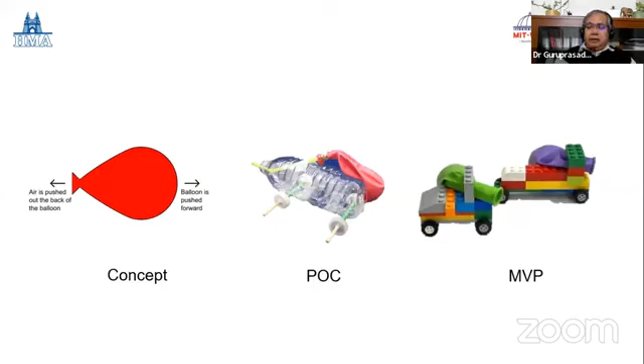Maybe one can be called a lorry and one a car, driven by this air balloon, right? And I think that is the important thing for any startup in order to get going. Soon after proof of concept, you should go ahead and make a minimum viable product and sell, make money. Entrepreneurship is all about converting creation to wealth.

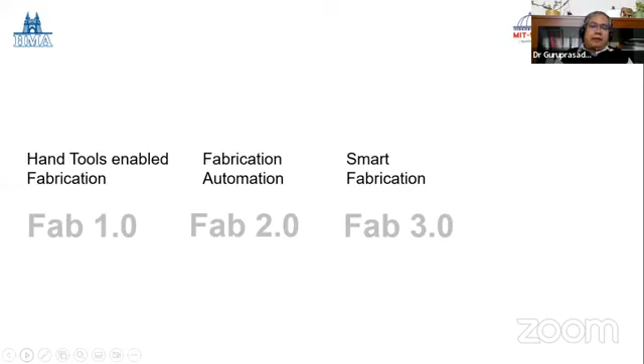So if we look down the history, hand tools enabled fabrication one, fabrication automation came a little bit with water wheels, steam engines, all that. Then with electric motors, smart fabrication came, and today we have smart bulk fabrication. Smart fabrication came with automation, robotics, and all. The smart bulk fabrication is because of the IT revolution, information technology and communication. Information technology and communication technology are fueling the growth of smart bulk fabrication.

How can bulk fabrication be smart? Can it produce just one part? Can a line system be changed so as to make the economic order quantity one? It is a manufacturing company's nightmare - how can we make just one? The term manufacturing was born in the early industrial revolution. Before that, there was no manufacturing at all.

The term manufacturing was defined to represent making of bulk, not in few hundreds, thousands, millions. That's very important.

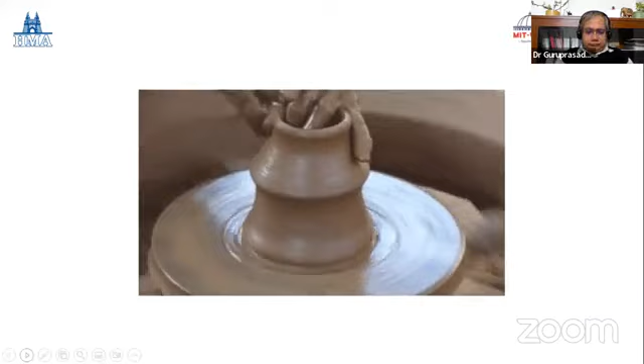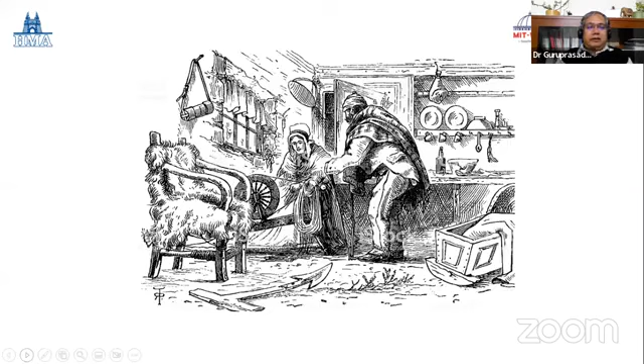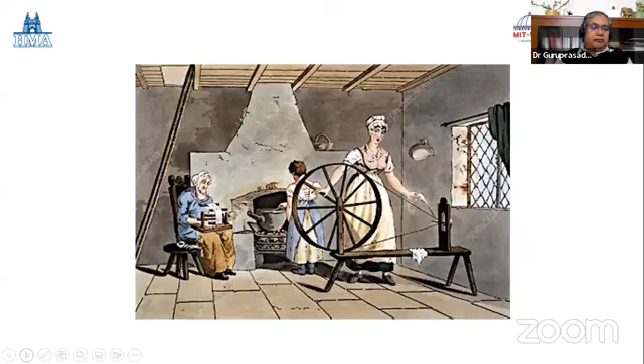And we know how they coped with the weather, and soon it gave rise to the cottage industry. But these were having delays. So in order to increase efficiency, they found mechanization. You can see here, this is a factory where you find no machine. People were doing the same thing at home, but now they are more disciplined, sitting in one place. And you can see there is a supervisor, and people who are going to train them or provide them with material. The first factory was born.

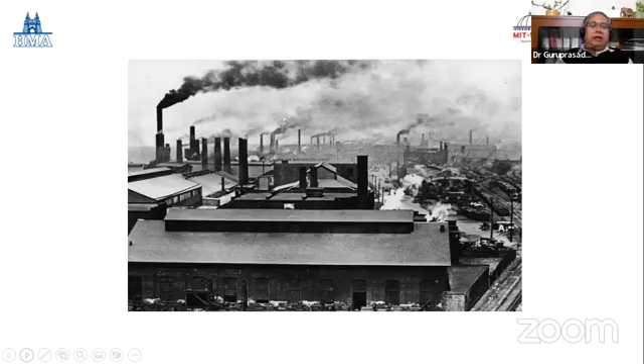With mechanization, they were able to put enormous energy into whatever they were making. In UK, we know the industrial revolution was born in the early 18th century, the textile mills. Probably Bombay, or any major city even in India which was a colony of British, looked much the same way in those days, that landscape. Soon was born the production line.

One side the chassis moves, and this is from Ford. It looks like a cow shed, no better than a cow shed. But you can see the whole concept: on one side the chassis moves inside, they put on all the engine, all the things, the seat, the whole thing comes, and finally they put the four wheels and it is wheeled out as a car.

So the division of labor, interchangeability, Taylorism, so many things came, and Ford gave the world the production line. Even today, for many cars, we need a production line which is dedicated. So we say this line cannot be changed because it is rigid, right? It is very rigid, we cannot change the line.

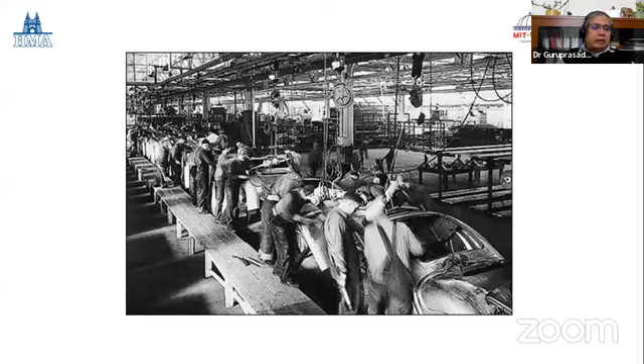So these were not flexible. But today's market is a place where the customer can ask for anything. We need to have agility. But the manufacturing setup is such that it resists agility. So how do we get agility? That is the very important point we have to answer.

With the advent of computing, a lot of things changed. The controls could be controlled not by a mechanism which moves, but with a wire which runs long, several kilometers. The electromechanical machine calculator gave rise to miniaturization because of miniaturization of electronics.

Soon, all such mechanisms gave rise to computing as a new discipline. So the world had a different, better, efficient means of making anything. Designing also became a very important occupation.

In the early 20th century, the Bauhaus school came and they started a new discipline called design, which is an iterative process. You can see how any product undergoes a sea change. You may have hundreds of concepts generated, only one is taken and launched. We call that an iterative process. You keep on doing it, and finally you get to the end of the tunnel, with some products getting into the market. That is very important.

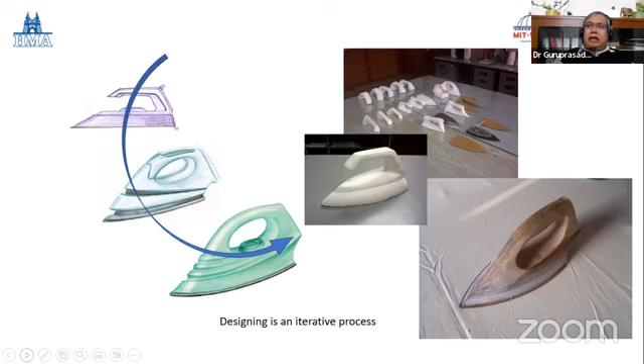Now, how do we do that? It used to take a lot of time. That's why marketing used to be under pressure, called time to market, which is long. So NPD was introduced - new product design.

People used to validate the idea, because any idea taken is not necessarily good. The idea has to be tested and validated. Only then does it become useful to business. If we launch every idea we want to launch, probably we'll become bankrupt. So an idea, if it has some potential, needs to be verified. How do you verify? Actually, you make it.

You can see the way people used to make things earlier - actually making a model, a mock-up model. In terms of electronics, you'll take a breadboard and assemble all the components and then check whether it works or not. If it doesn't, that is where the learning starts. You will know what is going wrong. Then you correct them. Now you know how it is, and you move forward.

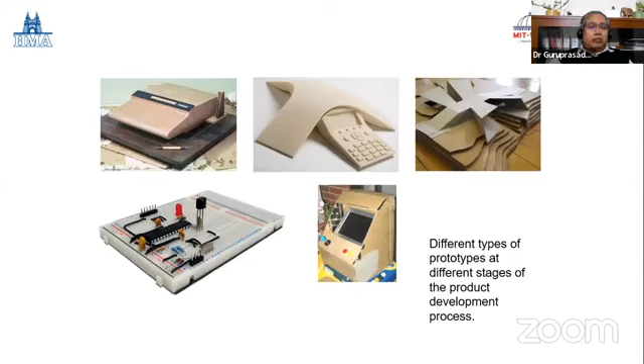With the advent of computing, people are able to do all these things much faster in a virtual world. On a computer screen, I can do any animation, any testing, any kinematics, because those are available - the small CAD and the big CAD: computer-aided drafting, computer-aided manufacturing. CAM also was introduced, and the big CAD, computer-aided design, was enabling people to make many decisions on screen.

But when you give this idea to somebody and say, 'I have tested it in a computer, it works fine, will you please fund me?' Nobody will fund you, because unless you have a touch and feel, unless you see it in real with all its strengths and weaknesses, people cannot make a decision to fund it.

So if we look at digitization of manufacturing, it has been happening for quite some time now, and people have started calling these different revolutions - revolution number 1, 2, 3, and 4. Nobody knew about 3 actually, but when 4 was defined, they had to define 3 also.

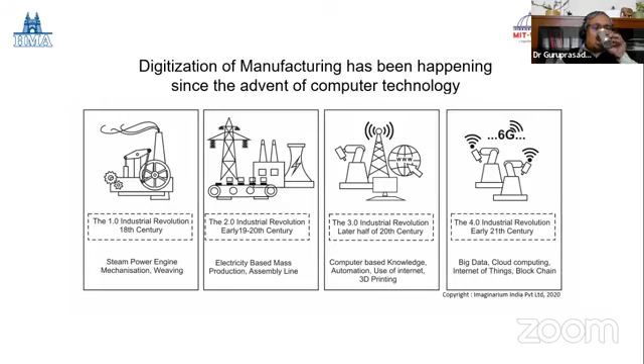In the early days, we used to do a lot of machining. It's wasteful. It takes a lot of energy to start with a large material bulk and go to a smaller form factor of the product or component you make, producing a lot of chips and using a lot of energy. This is called subtractive manufacturing or conventional manufacturing. So people were actually looking for an option.

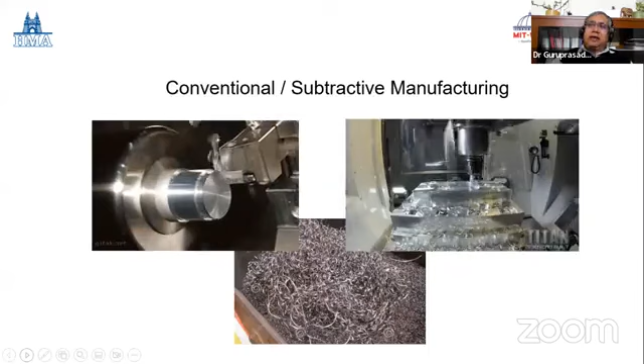There are many processes which we can call plus process, minus process, and zero process. We'll not go into those details, but whatever we had before, we wanted to change, and that's where people were looking for an easier option. Is there an easy way out? So they say, kuch paane ke liye kuch khona padta hai. When people look for this easy option, they also had to take care of certain things. We'll see what those are.

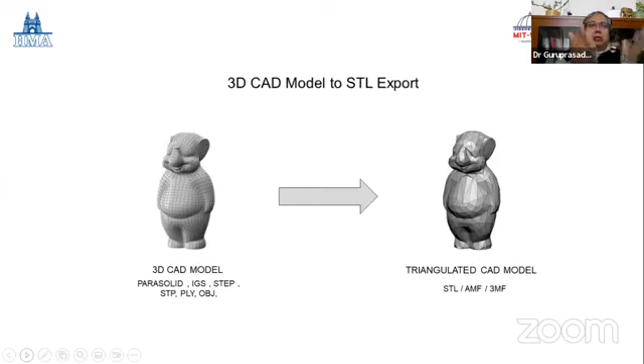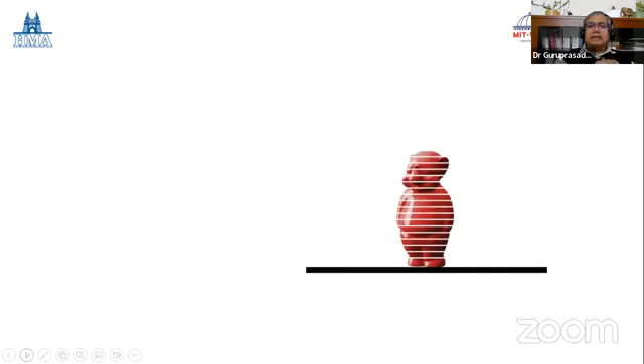A new way of making things was born. It's a regime where you're converting art to part, or we can say CAD to part directly, very important. How is it done? Whatever idea you have, you create a virtual model on a computer, then you take a software and slice it, and those slices are put back in the same sequence. This putting back is done by a robot, which we call a 3D printer or an AM, additive manufacturing machine.

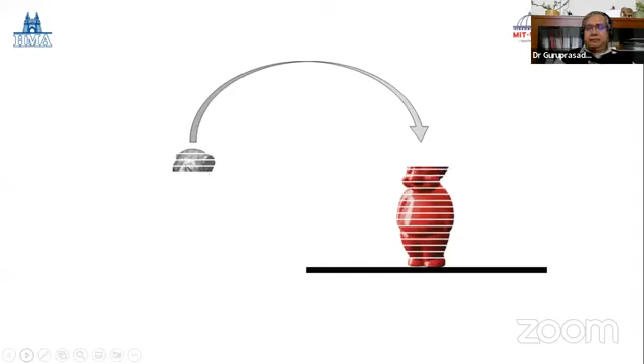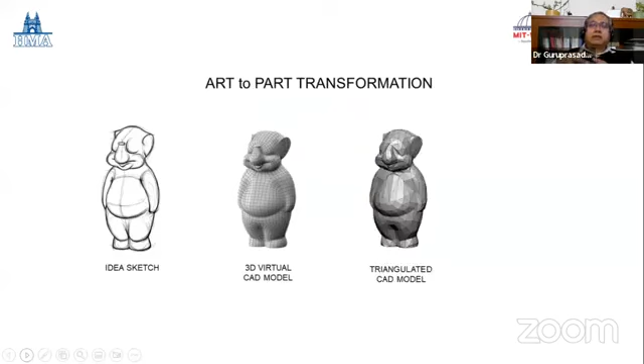What is happening here? The digitization of objects started with CAD on one side, bringing the digital entity which can be made in a computer. To enjoy it and hold it in hand, it was delivered by this technology called 3D printing. So it is bringing a kind of bridge between the virtual world and the real world. In Industry 4.0, we also call this a cyber physical system, where the physical side is delivered by digital manufacturing.

I will not go into the details, but 3D printing or additive manufacturing is misunderstood by many people, like blind people touching an elephant. Some say, I have seen a 3D printer, it uses a liquid. Others say, no, I've seen another 3D printer which uses powder. Someone will say, no, I saw a filament. Well, they're all right. They're all seeing the same technology, which has allotropic forms or different manifestations. But ultimately it creates a physical entity from digital data. You start with the digital data, give it to this machine system, and it gives you a physical model. That's it. It can be liquid, it could be filament, it could be solid, it could be powder, whatever — it creates an entity from digital data directly to physical data, which is as good as dematerializing and materializing it.

And so there comes the technology definition: 3D printing refers to a set of technologies — it is not one technology. It is a set of technologies which help fabricate 3D objects layer by layer from digital input data. Now, this digital input data could be a computer model done on a computer, or it could be scan data, or medical image data. With all this, we'll be able to recreate the shapes, products, or anatomy which may be required for businesses.

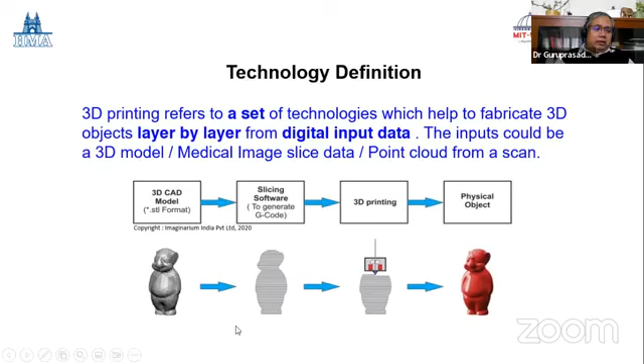So now let us have a quick comparison between the two. If we see, the traditional process is a lot inefficient compared to the additive manufacturing process, which has less scrap and less demand on energy. And so that is very important.

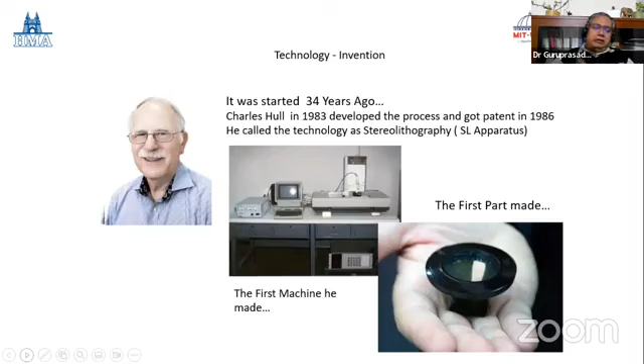So let us take a deep dive into the technology, looking at the pioneers. Charles Hull — his humble apparatus, what you see there, and we have the first part made there. Of course, Dr. Kodama was the first person, but he could not secure a patent for his invention; he had no money. Well, Chuck Hull became the person who held the patent for selective stereolithography. And soon, a patent is given, it triggers new thoughts.

When it triggers new thoughts, more people will look at it and would like to build a new way of making things. So again, we had a new way of making things by Carl Deckard — he brought in selective laser sintering.

Stephen Scott Crump, a loving father, along with his wife, was worrying about how to fix a toy for his daughter — how can I fix a toy which is broken? That led him to discover or invent FDM, the fused deposition modeling. Of course, he hired some engineers to help him out and all that, but the motivation was his daughter, right? He's not an inventor of the normal kind — extraordinary, out of passion and love.

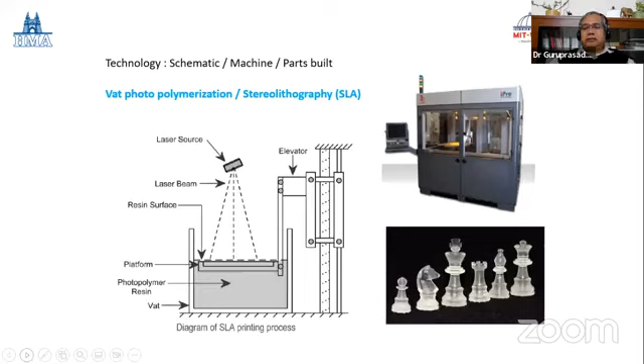Let us see some animation on this. You can see the tank, which is the photopolymer. As the optics scan, the material gets built layer upon layer, and then finally it is ejected out. You can see the ejection here.

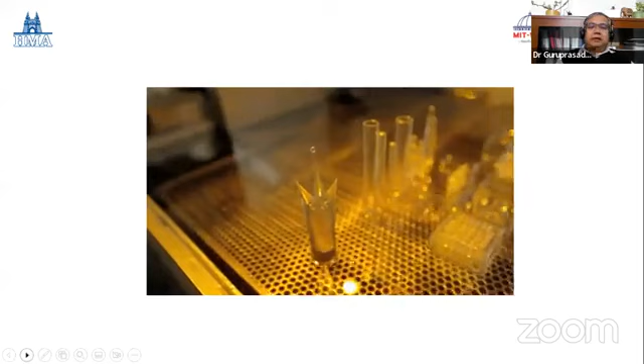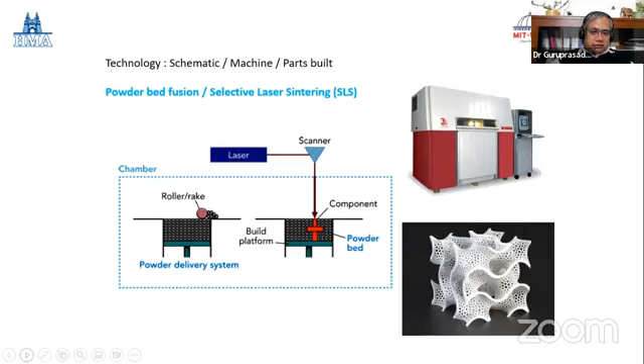The same thing happens with selective laser sintering, wherein a nylon powder is compacted. It becomes a sheet of nylon powder. When you expose it to laser, it sinters that. Let us see an animation. You can see how rollers roll fresh powder and it is exposed to a mirror, which is reflecting CO2 laser, which is a heat radiation. So it melts the powder selectively.

Let us see a zoomed version of what is happening. It is having a kind of a tack weld. The red particles are hot material because of the impingement of the CO2 laser there, and the gray ones are the cooler ones. Nevertheless, when this part is made, it will be quite porous and permeable. So this is what happens in this particular technology, SLS.

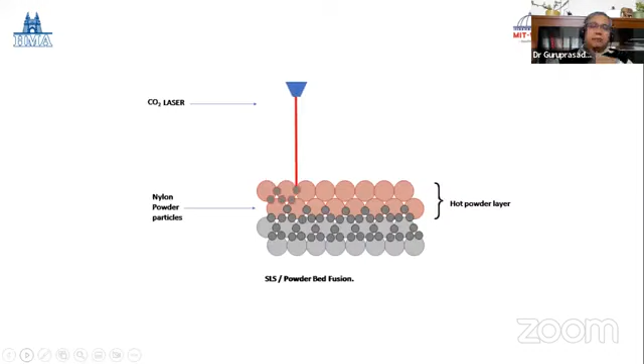The parts are porous, so we need to do some treatment. For a plastic or for a metal, you have the same problem. You need to take care of that.

We can see how it operates, a kind of phantom writing the concentric circles is actually the laser doing this sintering. Layer upon layer, this is done in order to build the parts. After a part is built, the cake is ejected, and you blow away all the loose powder. There emerges the product, what you have actually intended to build.

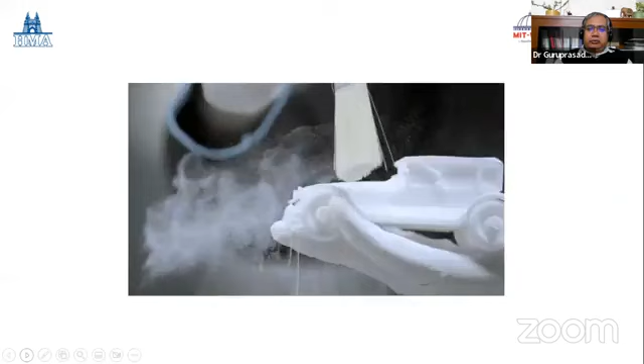You should be a real expert to run a smaller machine, because it will get stuck. It is not built with all the robustness and reliability. So sometimes enterprises don't buy such smaller machines because it is a great risk. If a customer gives an order and you cannot deliver, it is a great danger. And if you deliver an inferior quality product, they simply reject it, meaning it comes back to you and you have no option but to suffer losses.

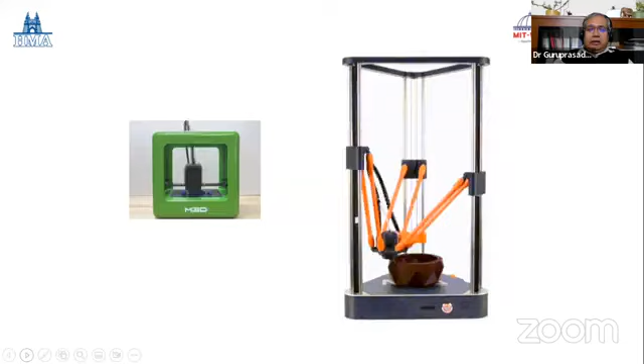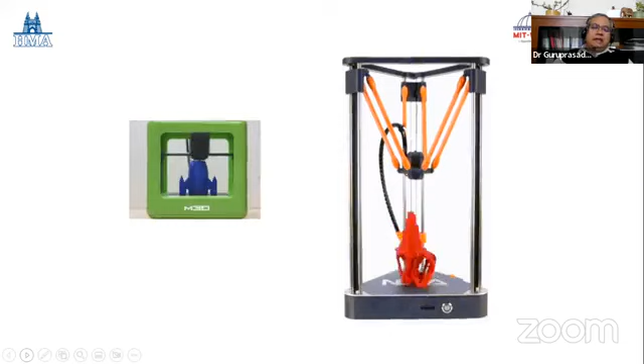You can see here how it is building things. And of course, there are small and big versions of the same product, same technology, that have emerged. Because of open source, we are able to find a lot of such machines in the maker community.

It was further copied in a different form. Instead of a laminate, Mcor uses paper, your A4 papers, glues it, and then prints it with color. Even this company could not sell well because there is no industrial application of this. It is not durable enough, so industry simply rejected it. It's a matter of time.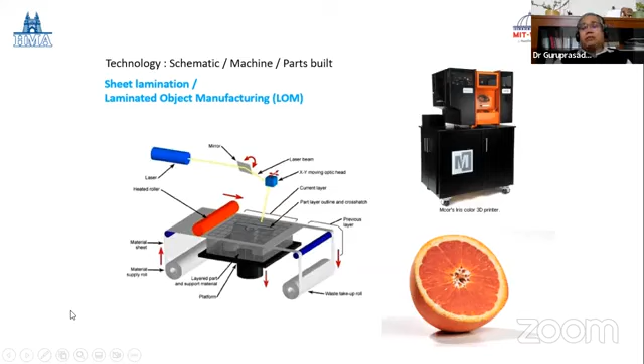So there is a new avatar of Mcor also, which people have brought in. Now the 3D printing word is actually given to this technology called binder jetting. So what exactly is binder jetting? Binder jetting uses a binder, which is an adhesive, a glue, a gum.

Suppose I have some gum and I pour some atta, the powder, into it, and soon the powder absorbs all the gum and becomes a solid. It dries as a solid body, right? And that principle is used here.

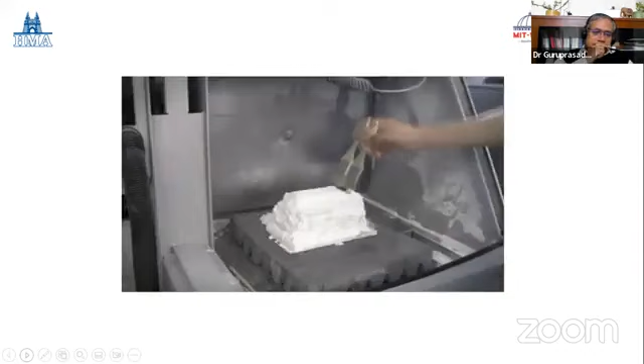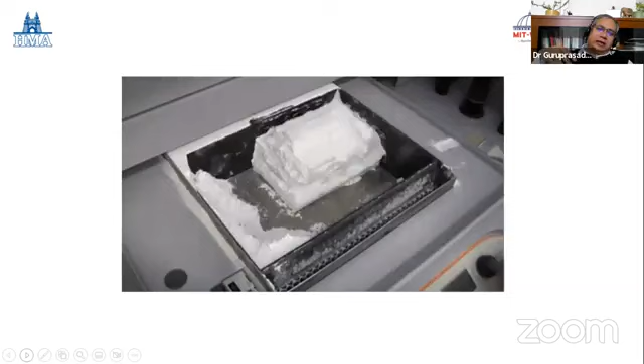It looks like a plan being drawn by an ordinary printer, but as it goes down, you build walls, roofs, etc. You can see it can also be printed with color. We are checking here, they're taking out the part, and you can see the final part.

Well, this is material jetting, or polyjetting, or multi-jet, as we call it. This is for the first time they started bringing a system which uses a digital material. What is a digital material? If you have tank A and B, by mixing different proportions of this at a 3D pixel level - what is a 3D pixel? A 3D pixel is called a voxel.

Voxel is the smallest unit where a 3D printer can build something. The smallest entity it drops is a voxel. At that level, if I have tank A and B and mix them in various proportions, I can define that voxel, that 3D pixel, to have a certain property, and that is going to vary. So you can have a product which is fully transparent on one side, fully opaque on the other. It can be very hard on one side and very soft on the other. Those things are all possible.

It is something like our own hand - the hand has muscles, soft to touch, with skin. But inside we have a bone which is very hard, a hard tissue. Same way here, you can see a part floating in front of us has a black soft O-ring, a manifold which is gray in color, quite strong and hard, and will take stresses. Then we have a button actuator, which is hard from inside, soft from outside, to actuate. The whole thing is built as one.

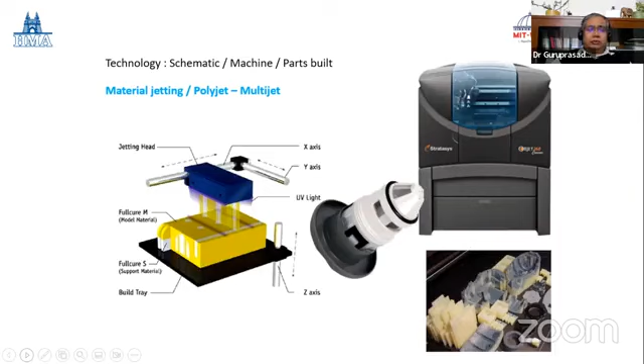This brought out a new concept called digital material, where the property from opacity to transparency, hardness to softness, can vary, and color with 16 million colors can be used. That is the capability you have with this technology.

You can see here how a paste-like material is coming out and it is exposed to UV light, which is green in color towards the rear side. As it moves behind, there's a green color showing the laser.

In powder bed fusion, the laser travels several kilometers in order to build just a few gears. But high-speed sintering, on the other side, makes bulk quantities of things in a very short time. It's much faster compared to powder bed fusion. So I think the technology is moving towards that combination of speed and quality.

We also have directed energy deposition, called electron beam melting. Wonderful things can be made, like this glove, which is not for surgery but for war, for example. One can wear this and will not get cut from a knife if it casually comes in contact.

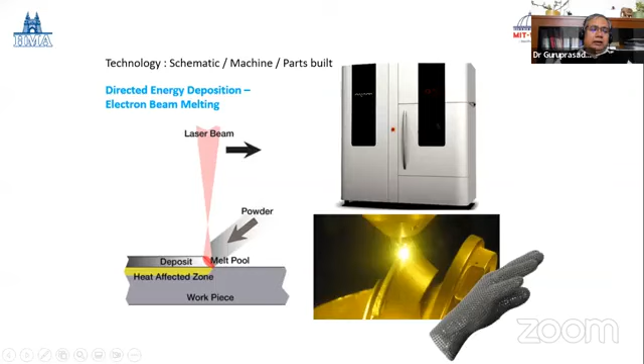In metal powder bed, there's a lot of change compared to polymers. In polymer, when you have a melt pool, it is not very heavy, whereas in metal this melt pool is of higher density compared to the powder, so it starts sinking down.

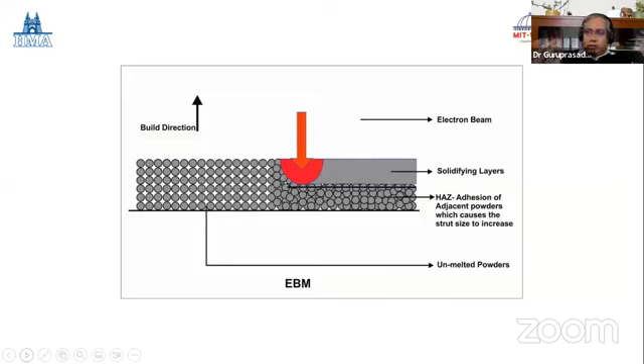There are a lot of techniques to address this. One of them is giving support, not just support for the sake of support, but making tubes like heat pipes that scavenge the heat out as required. Otherwise the whole thing will deform, it'll have warpage, cold shut, and so on.

You can see here how the metal is scanning in order to complete the product, shown here with flame. The flame appears because the laser itself cannot be seen by normal eyes unless we have a special filter or scope. What you see here is its after-effect.

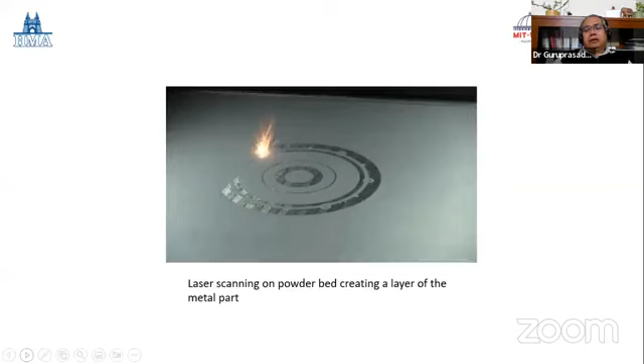This is yet another technology where powder or wire can be directly used to melt as a small bubble, or rather a drop. That drop generates many drops together, which construct a product quite economical compared to other methodologies.

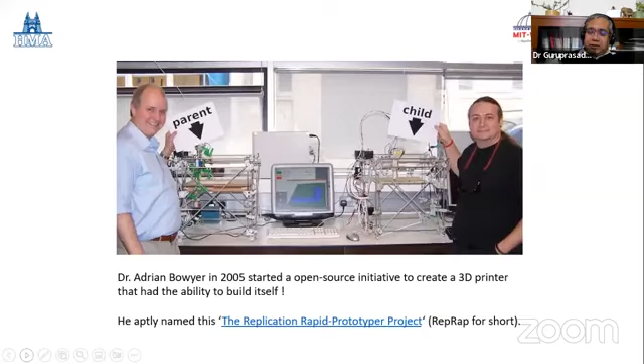These are some of the metal printers, they come in all shapes and sizes. In fact, Bowyer brought in the new concept of parent and child, a 3D printer printing itself. Many cartoonists also wrote about this in the early 90s, a 3D printer printing itself.

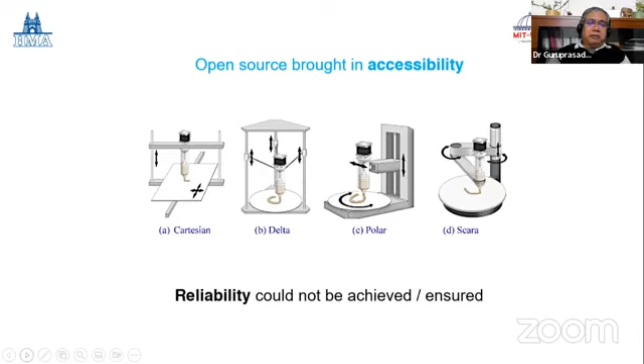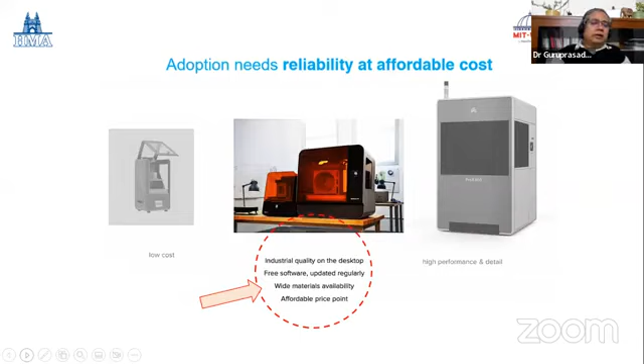The open source movement also brought in new desktop options for us. These are some highly reliable machines which are small, so the investment is small. You don't have to buy a big one. You can have a Form Labs machine, for example. Quite interesting, they're everywhere now. So you can see the development.

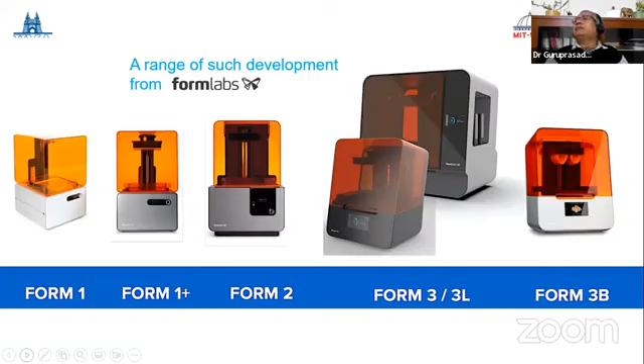Some companies developing and bringing out new versions will win in this kind of market. Form Labs, for that matter, has been doing a lot of work. They have not disappointed consumers or customers, always delivering good results, good consistency, and low price. They are really disrupting, I should say.

The aviation industry also acquired some companies like E-beam. The E-beam machine was acquired from Sweden, and they also acquired this Concept Laser company, which now, with a lot of funding, has done a great job becoming a great solution for all of us. These are all for metal and biomedical applications, like metal implants. What's so interesting is these systems are smart and Industry 4.0 ready.

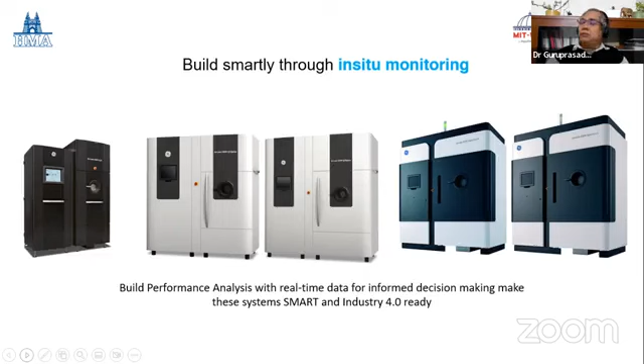This is a very humble avatar of a 3D printer. Well, I cannot say, can we call this a 3D printer? It's a big question, right? You're going to hold it in hand like a pen or a glue gun, and you're going to make parts. Let us see how it is done.

What is the difference between this and this? This pen, if I hold it in the KUKA robot, the KUKA robot will become a 3D printer. That means if the KUKA robot can take the digital input data and deliver it, then even this 3D doodler can be considered as a 3D printer.

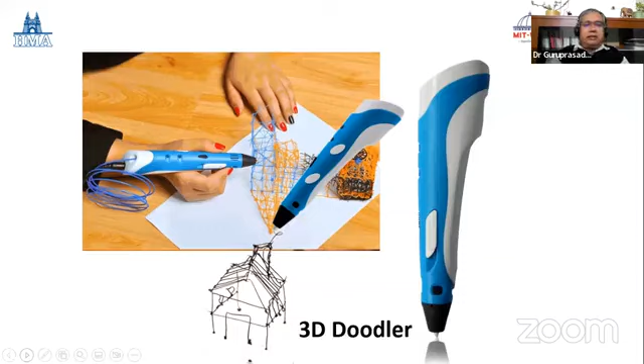Right now, it is not a 3D printer because the idea comes from the head, not from digital data. Nevertheless, we can build some things, like what they are building.

Unlike the earlier one, this is out-of-the-box 3D printing where you have data from the computer coming to this print head, which is depositing material layer upon layer.

You can see there need not be any layers also. We can do away with layers. You can see it is at an angle and it's still doing it.

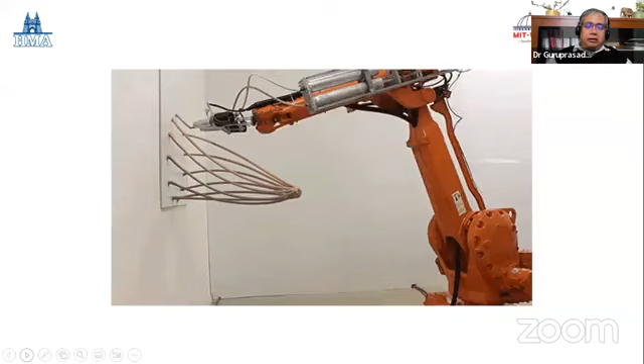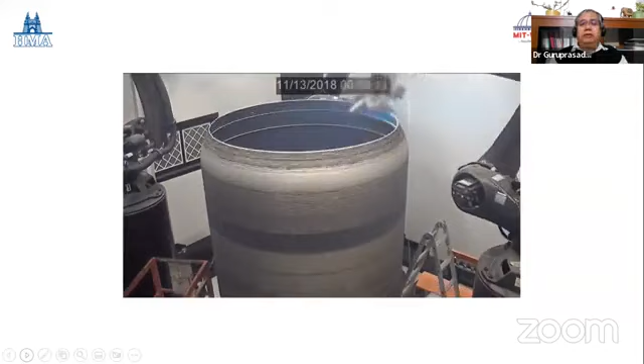Of course, large objects for aerospace applications are being tried. This is a company called Relativity, which is a competitor to SpaceX.

In additive manufacturing, most importantly, we have control over each layer. For the first time, you would go for this—to some extent you can do that in casting, you can do it in some of the...

Activities where you can change—now you have control, to some extent, in sintering. So I can have different materials and sinter them together to get a bimetal or something like that. Whereas in normal manufacturing wisdom, it is not possible actually to have control over a particular layer.

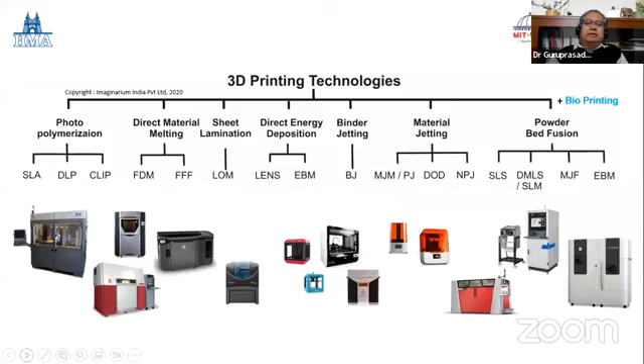Added to all this is also bioprinting. So it's disrupting every sector: jewelry, medical, FMCG packaging, lifestyle, architecture, car, white goods, electronics.

We can think the unimaginable and make the impossible. These were not the words which were taken from the early industrial revolution. That time, probably one used to think how to think also, and to think the unimaginable was out of question. Make impossible was also out of question.

But today we say it is possible to imagine anything and get it made and use it.

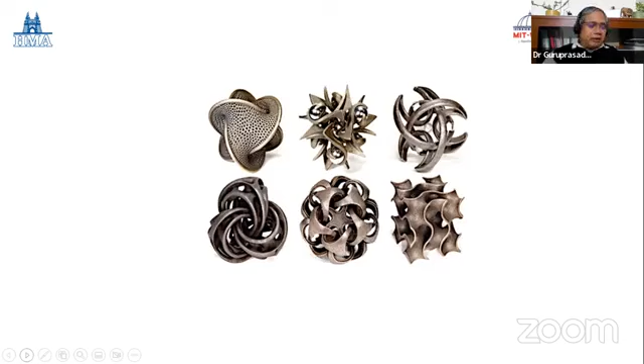So what do people use it for in the world? People largely use it for part consolidation. That means if you have 100 parts, you can combine them to make one component. Part consolidation, jigs and fixtures—rapidly helping one to develop, in half an hour's time, a jig which can be used. It's quite popular. Need for lightweighting.

Where is the need for lightweighting? It is there in all things which are airborne. That means they have to balance against gravity, they have to move against the thrust. Thrust is forward, drag is the opposing force—it has to overcome and move forward. So mostly lightweighting was used, or thought to be used, in aerospace applications.

But with EV vehicles, which have batteries—before and after charge, the weight is the same, but before charge and after charge it will behave differently. So for EV vehicles, wherein the dead load was more for cars earlier, they had to optimize it. There's a need for lightweighting there.

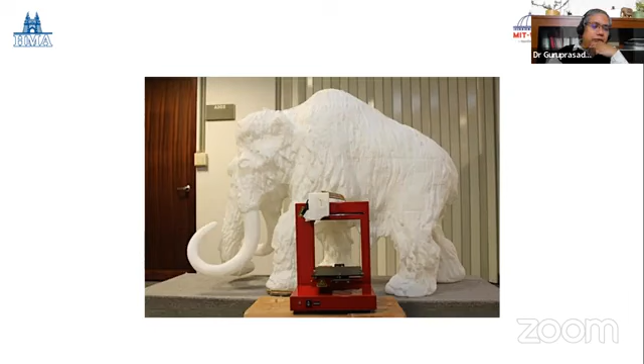Can you imagine? That's the beauty of what it can offer.

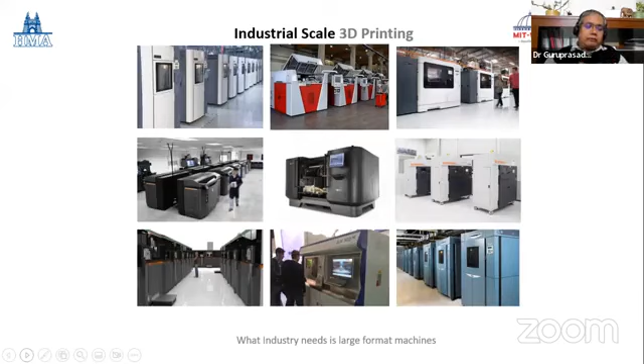So these are some of the advanced machines, the future of the so-called industry. If you look at the pros and cons, you can see both sides. 3D printing cannot give you bulk volume, whereas for complexity, nothing can match it. In between we have injection molding, investment casting or vacuum casting, CNC milling in that order, and these production machines can deliver volume - injection molding, one second a part comes out. While 3D printing cannot give you high volume, it can give you any complexity.

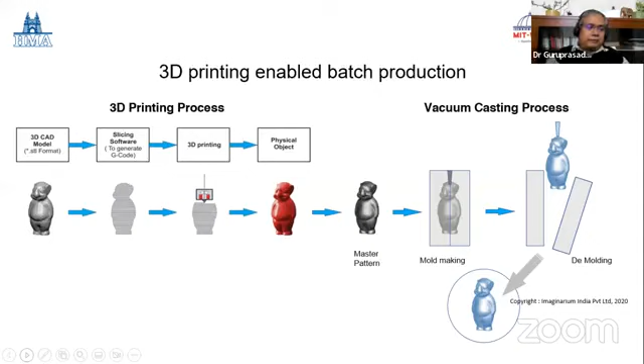Very important - let us play with the strength, not the weakness. What this shows is after building the physical object in red in the middle, you finish it, and that becomes a master. Then you have mold making - we cut a silicone mold, and when you remove the part from inside, the cavity is left behind, which becomes the cradle for the next part.

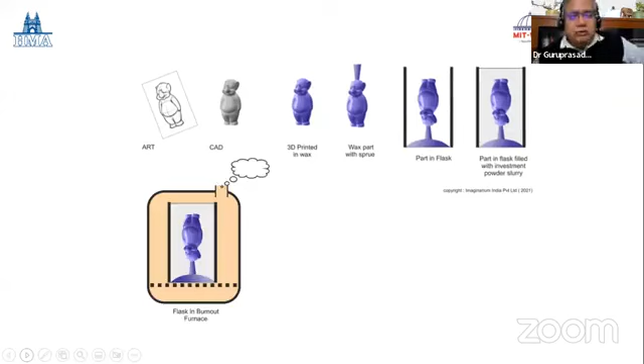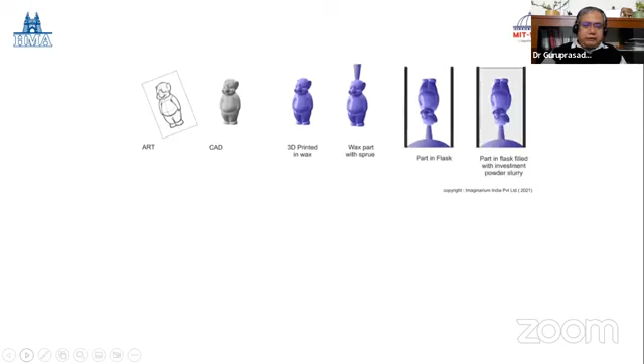So in 3D printing for additive manufacturing, particularly in jewelry, people with a CAD design go to a 3D printer, print in wax, then using lost wax investment casting process, they make the parts. So it's an indirect way to make this golden elephant. You can see it has got a lot of labels there - don't worry about them now - but you can see the end result. So CAD to part, very important.

In fact, the new generation is looking for some change. Now the one-size-fits-all logic doesn't apply. The youngsters today want to tell the world I've arrived, and I want to buy this - I want to have it customized. Some of these aspirations are driving agile manufacturing - they see something somewhere and next day they want it made, they want to wear it. This has led to people having a lot of creativity, and so jewelry has become a fun object.

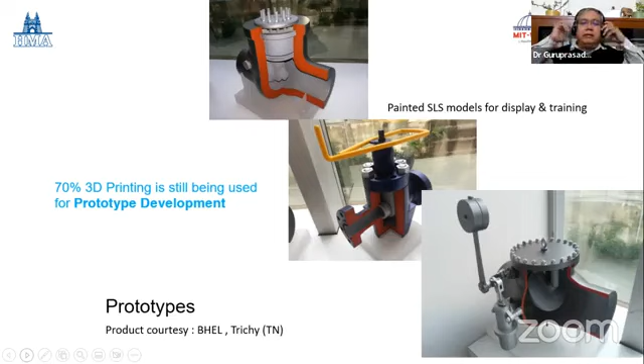So we know 3D printing makes a lot of sense in helping us out in various aspects of product creation. Today we talked about proof of concepts, so in a way this is not product - what you see here is a large butterfly valve, which is recreated just for an exhibition with cut section and all. The whole thing is made by nylon. It looks as though it's real, right? The whole thing is made by prototyping.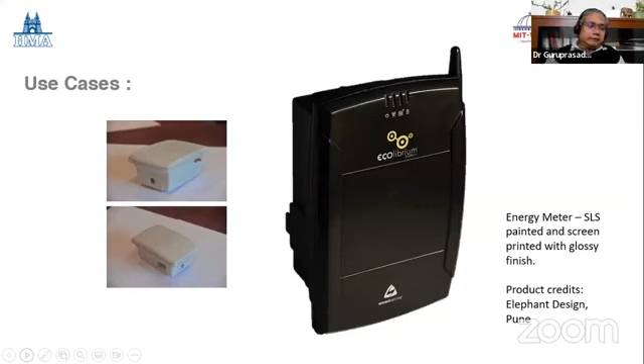So this is a case study wherein we developed a kind of IoT device designed by Elephant Design, Pune, and it was delivered with this kind of finish. The 3D printed part you see on the left-hand side, and the finished part you see on the right-hand side. This is yet another product which is IoT based, and there's one more IoT based.

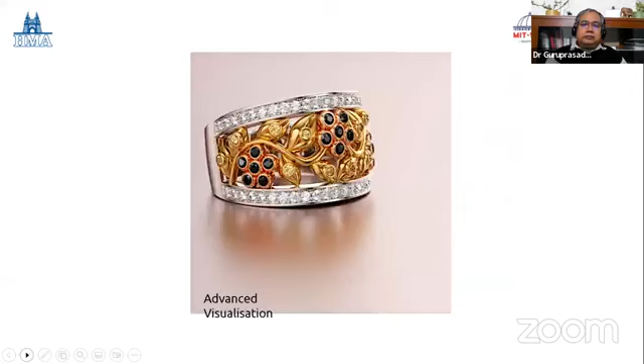When do we say there is a sensation? Whenever there is something connected with Bollywood or Hollywood - so that's where jewelry comes into play. These are all some jewelry examples. You can see how it is transforming the very nature of the product because of the capability - people have used primitives, spheres, cuboids, directly linked and used as jewelry.

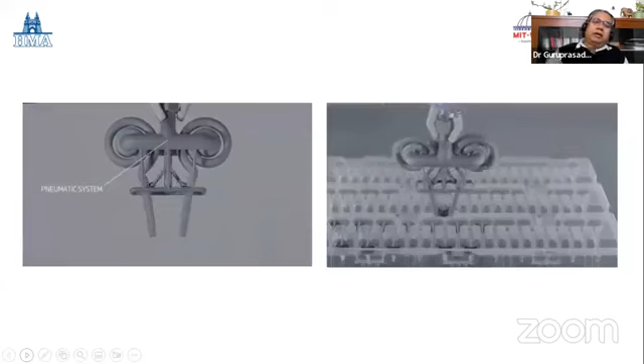You can see here it's a compliant mechanism which has got no moving parts. It is pneumatically actuated. It's an actuator of a robot which can do pick and place from one tray to the other, one point of the tray to the other part. As you can see, it works on compressed air, and the whole part is 3D printed.

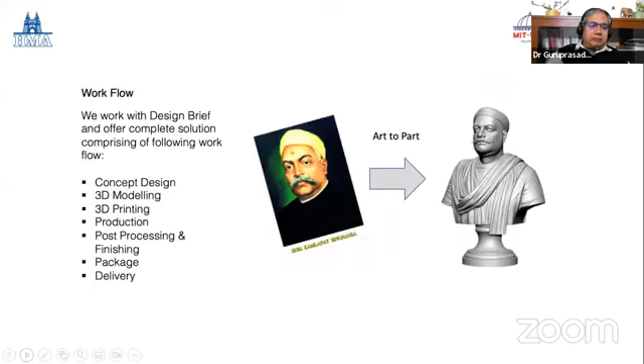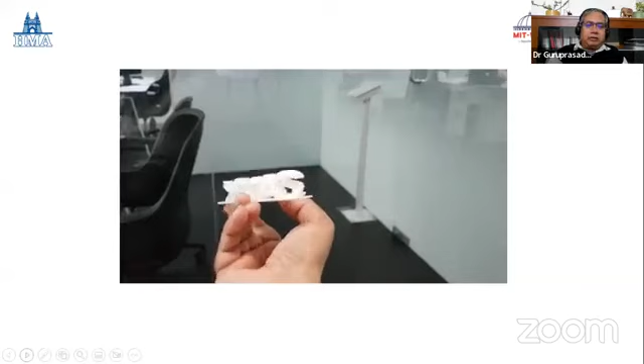We have also done many things like this, trophies and all - this one is interesting, it rotates. So you can see how people have been freaking out with the kind of transformations they can bring. This is a way of having a typography which will read two different things, messages at two different angles, and so are these.

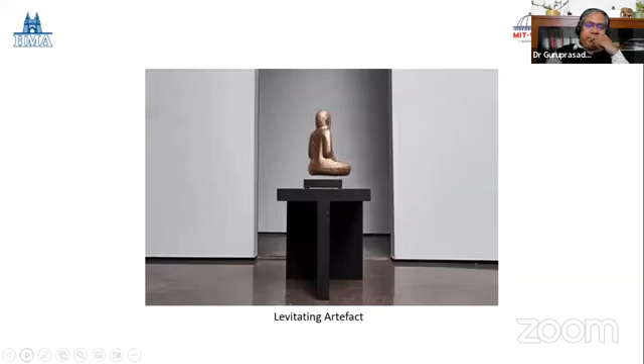The future of 3D printing is moving beyond prototyping to end user parts. When we started early in '86, it was used mostly for making mock-ups. Then there was a design validation model by 2010. By 2016, we have a component that can actually be used as a final product, an end user part. That's how the whole technology is moving.

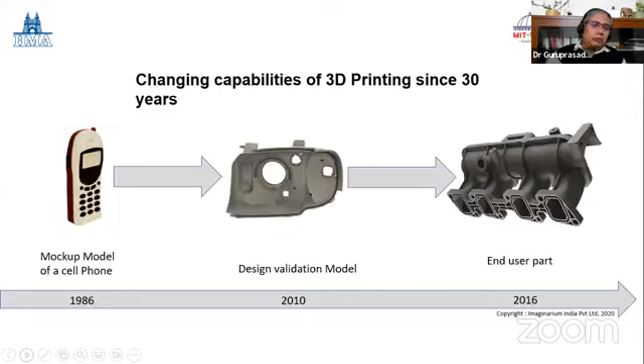If you look at it, 3D printing is a small part of a larger spectrum of things. First you should have an idea, then the idea is converted into 3D CAD, then it is exported in a particular file format to the 3D printer. The 3D printer requires material and care, and further you have post-processing, which will finally get packed and sent. That's the whole spectrum.

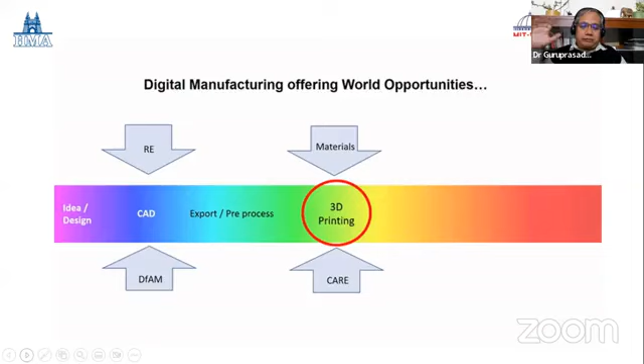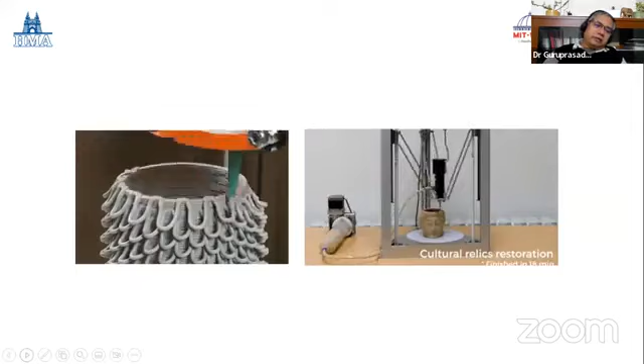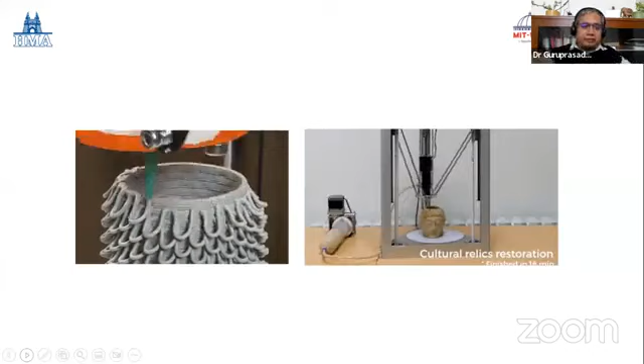So you can see here how uniquely this is beyond CAD - it is not following CAD because the nozzle stops at a particular point, more clay is going to flow and it is again resuming. This is a clay printer. Using a clay printer one can deposit clay layer upon layer.

Some of the artifacts made on this printer, you can see, it was developed by us only. It is very great fun. If we want to understand, buy a kit for 10,000 or 20,000, start building it, and you'll find there are a lot of applications you can start extending to.

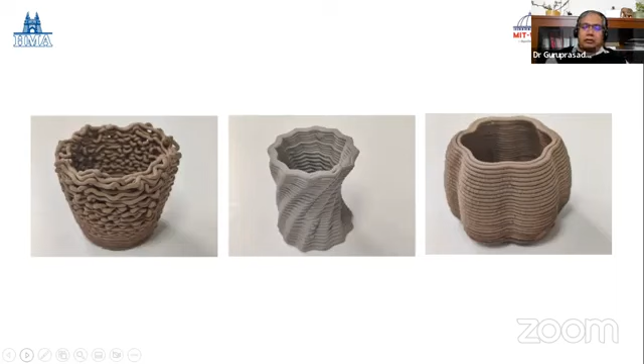They come in all shapes and sizes, what you can see here. In fact, the bulk of 3D printing is done in the medium and small-to-medium sized printers. Of course there are many large format printers, and also at the micro level people can print things. But if you see, an individual designer, maker, or artist would rather go for a cloud option because that would be very economical for him - he doesn't need to worry about anything. You just order and get it. If it is not good, you return it back.

So this has brought out a new opportunity called the cloud factory. The factory is where it is in a cloud. So you can just upload and get it delivered. That's it.

Because additive manufacturing, 3D printing or digital fabrication, as we call it, is able to make just one-off and still make profit, we say this is best. And why is it for the new age? The new age aspirations are different. A person wants his own style shirt, his own style button, his own style food, for example. Manufacturing sometimes deals only with bulk production. So how do we handle such requests for one-off things? That's where 3D printing comes into the picture.

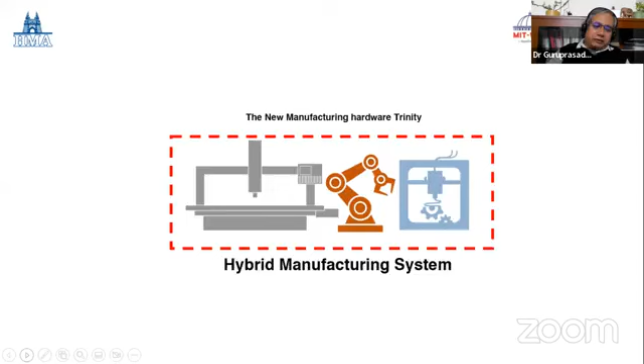So I foresee that the future is about hybrid, where a CNC machine, a 3D printer, and a robot will come together to deliver whatever we see in this world today. It'll all be delivered by these three manufacturing pillars, the holy trinity of manufacturing. Design will lead to consumption, and manufacturing will be taken for granted. It will take a back seat.

I do not fix the problems, I fix my thinking, then the problems fix themselves. So I think with this, we come to an end of my presentation.

My advice to all of you is, if you want to 3D print anything, you should ask, why should I 3D print it? What value is it adding? Just because you have a 3D printer, don't 3D print anything and everything.

It is not possible. So we need to understand what good things we can derive from this technology, where it fails, and where it takes us to success. If entrepreneurs know this, then probably you'll not make the mistake others did, of having a printer, not able to use it, no ROI, and suffering loss. That should not be the case.

I think all the startups, MSMEs, SMEs, they should look for a 3D printing partner to start with. Learn, okay, then use it, then you start owning it, right? That's how it is, so by the time you can invest. Otherwise, people will put this capability in the wrong application areas.